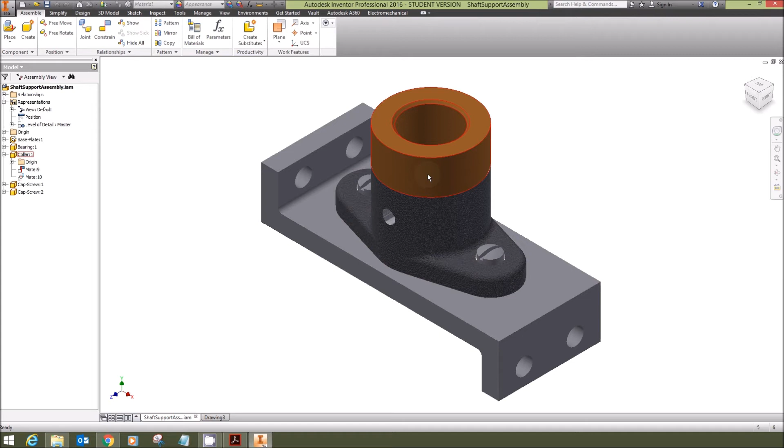Okay, in this assignment, you're creating drawings that go along with our shaft support assembly. You're creating detailed drawing sheets of the three major parts used in this drawing. I'm not going to show you how to do those. Make sure you've got the correct views, detailed dimensions, everything lined up right in the right place, correct annotation, title bar, all that kind of stuff filled out.

Okay, what I want to show you is creating our assembly drawing with a parts list. So we've got a B-size sheet.

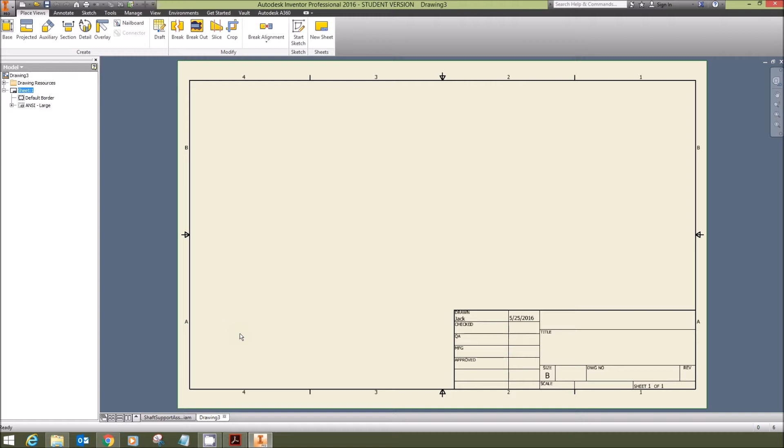For my base view, I want to choose my assembly drawing, and I'm going to choose no hidden lines, but not make it shaded. I want it to just be black and white, 1:1 scale, and I want my isometric view.

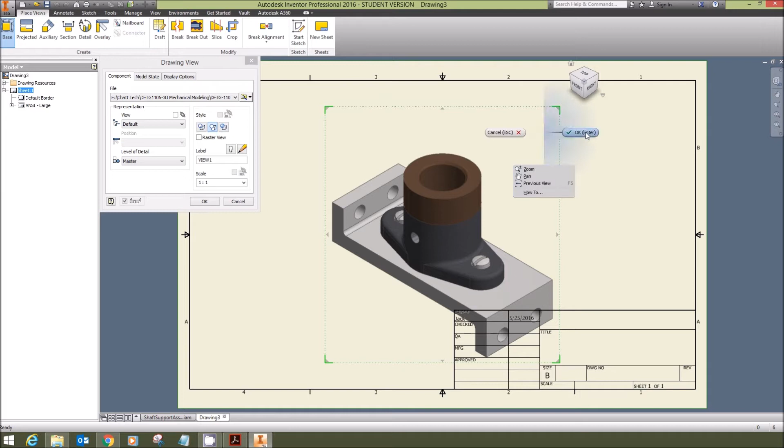And then I want to pull it over to the side a little bit, about like so. Okay, so I've got it in here. You can see it's showing the tangent edges, which in our case is okay because we've got fillets. We want to know that.

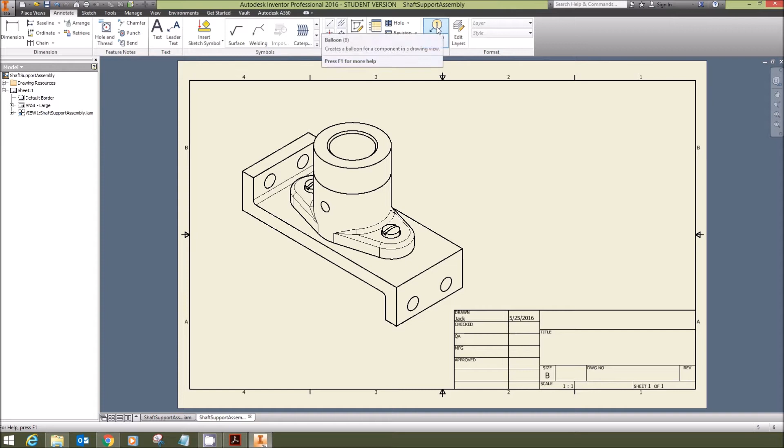So I go to annotate here. I want to apply parts list balloons. So I go balloon and I want to select my components. And I'm going to go okay.

I'm getting some lag because of the screen recording here as far as where things are moving. So I'll right click and continue.

Let's go to the screw next. You can left click once and then drag out again, and it'll give horizontal shoulders if that's what you like. Click again, then right click, continue.

And you can see I'm doing these manually. I don't really like the auto balloon feature. Well, that one didn't pick up a leader. Let's see. All right, and I've got the bottom one here. I didn't pull it out far enough there to place it.

With auto balloon, you have no control really over where all your balloons end up, or even where the arrowheads touch them. That's why I kind of like doing it manually. I feel like I've got more control over how the drawing looks. Okay, now this one, let me pull this one in a little bit.

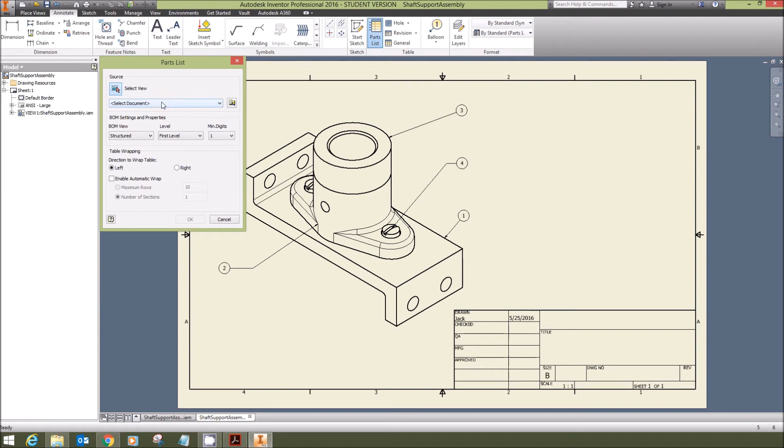There we go. Okay, next we want to do a parts list. So I want to go parts list, select my view. Everything looks good there, so I'll say okay.

And I want to bring it over here. I'm getting screen lag from the recording. You want to place it right there, that's good right there.

All right, so you see it pulls in the item numbers, which are the balloons that you used here. Part number, excuse me, is how these individual part files are saved, it's the file name, because when I created this one, I used the names of the parts instead of a numbering sequence.

And then the description, that would be the name of it right here, is the way that should work out. So I may need to go back and redo this right here. But that's how you do a parts list.

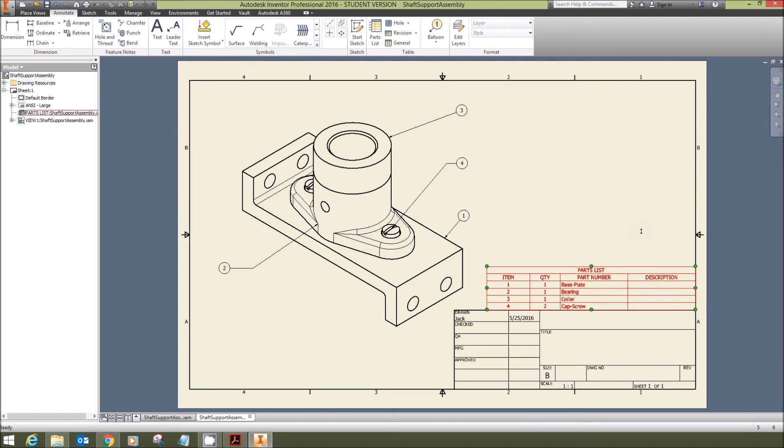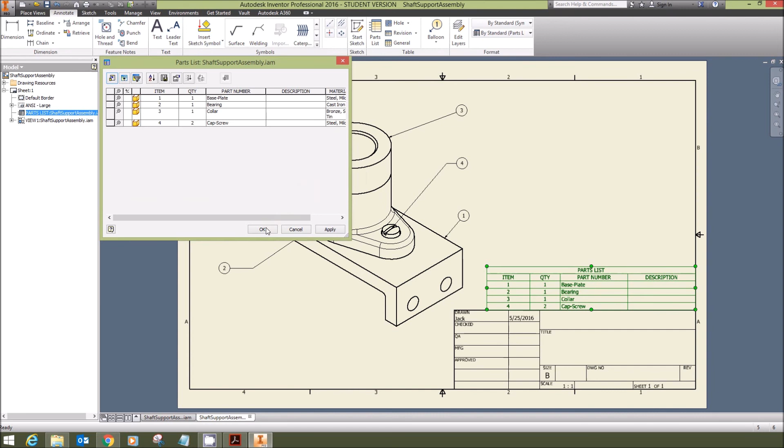If you need to edit the parts list, you can select it, right click, go edit parts list, and we can change, add columns, because a lot of times I like to include the material type in the column. And see, it will pick up your material type based on the iProperties of the parts.

So you may have to play with the width of your columns to get something that looks good. And you can see it's overlapping into my drawing now. So there we go, just kind of playing with that, getting that looking good.

We would want to edit that, fill in the title bar. But that's basically how this one is. It's pretty simple, okay? Looks good.